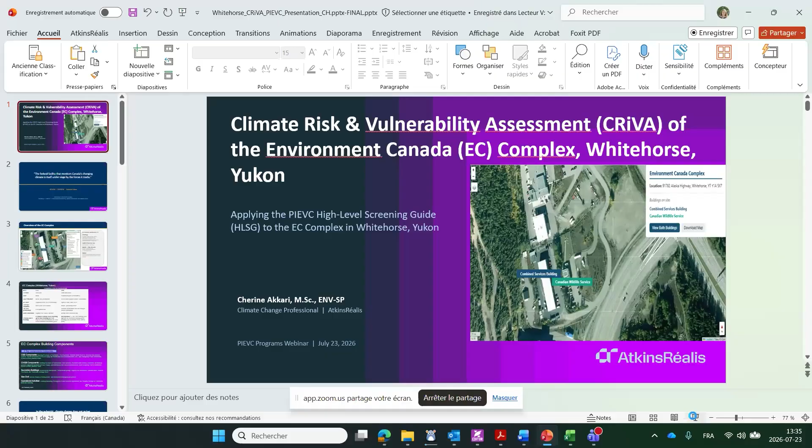Really quickly, just a quick introduction to Cherine. Her first presentation is again climate risk and vulnerability assessment of the Environment Canada complex in Whitehorse, Yukon.

Cherine Akkari is a climate change specialist focused on climate risk and vulnerability assessments for infrastructure systems and municipal assets. She has extensive experience applying the PIEVC protocol to evaluate climate hazards, integrating outputs from regional climate models, including downscaled CMIP6 projections commonly used in Canada to assess future risk reductions. She conducts risk assessments using PIEVC-aligned methodologies consistent with ISO 14091 and ISO 31000.

She integrates climate considerations into engineering design, asset management, and planning processes to enhance long-term resilience. She will be introducing a project focused on the federal complex, where Environment and Climate Change Canada monitors Yukon's rapidly shifting climate under siege by the forces it tracks. Using the PIEVC High-Level Screening Guide, or the HLSG, they screened 322 climate infrastructure interactions across 14 hazards and 3 planning horizons.

They also held multi-day workshops with ECCC operators. The findings expose how compound hazards reshape risk at a pace that outstrips current design standards, and a concordance analysis confirmed that projected snow and wind loads will surpass current code design values before mid-century. That is all really great, and she'll be elaborating on this project even further.

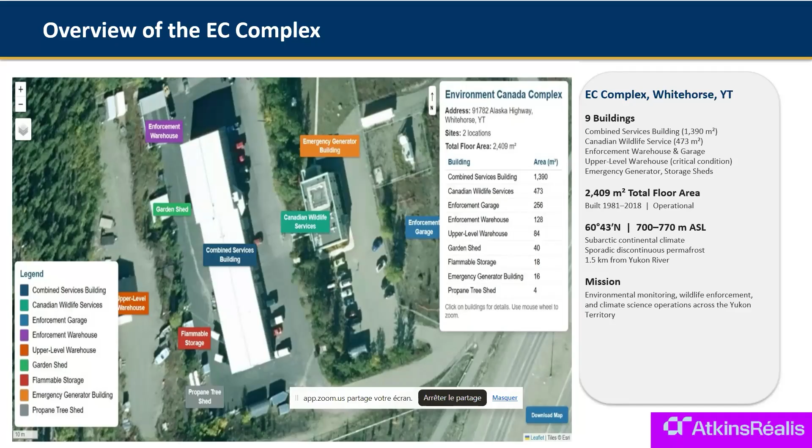Let's dig in a bit into the two main buildings of the site. So we have the Combined Service Building and the Canadian Wildlife Service on the right. Both have elevator units. One is older than the other one. In terms of roof, one consists of metal, the other is asphalt shingles, which makes it combustible when wildfires happen in the region. In terms of superstructure, the CSB has metal as well, and the Canadian Wildlife Service has wood frame. For the AC units, they use mostly R22 condensing units, some of which were upgraded in 2018.

In terms of envelope conditions, the CSB has more wear, that means more repairs, and the Canadian Wildlife Service has a newer envelope, which is generally performing better. In terms of water infiltration, the CSB has more issues than the Canadian Wildlife Service building. In terms of backup power, the CSB has a dedicated backup power building, as well as an internal EPDS battery pack, which is the emergency power distribution system. The CWS does not have any associated backup power building, but only has an internal EPDS battery pack inside the building itself.

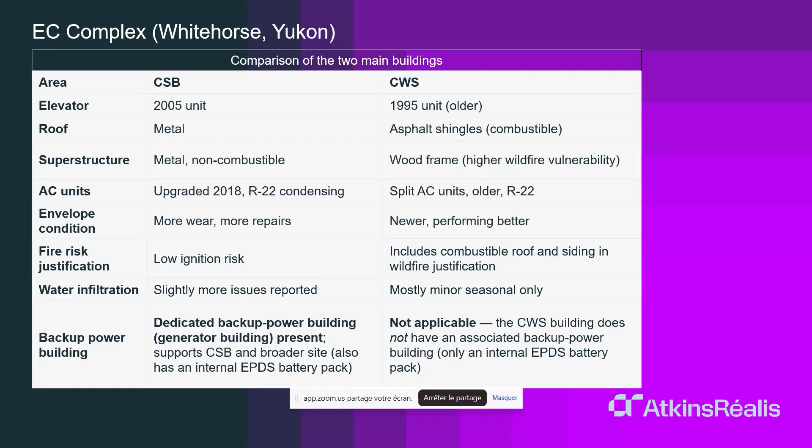After doing some research about the site and validating all the components with the stakeholders associated with the site, we came up with 4 infrastructure component categories, which are the two main buildings, very detailed: building systems, roof system, exterior walls, etc. So these are the subcategories. We also have the secondary buildings, which I showed in the previous site map. Site civil consists of access road, parking areas, and stormwater management system. In terms of operational activities on the site, we have loading and unloading activities. We also have emergency power distribution system operation, and propane storage and flammable materials handling.

So what makes this site specifically vulnerable to different climate variables? One of the key messages is that climate change in northern regions rarely arrives alone; it arrives as a convergence. For instance, below ground, we have permafrost degradation, which affects mostly foundations, buried utilities, and drainage systems. Above ground, we have intense precipitation. Here we're talking about mostly increasing precipitation, short duration, high intensity rainfall, rain on snow events, which place growing stress on roofs and site drainage. And on the other hand, we have fire and lightning, which are very common in the Yukon region. So all these hazards interact with one another to create risks that are usually bigger than the sum of their parts.

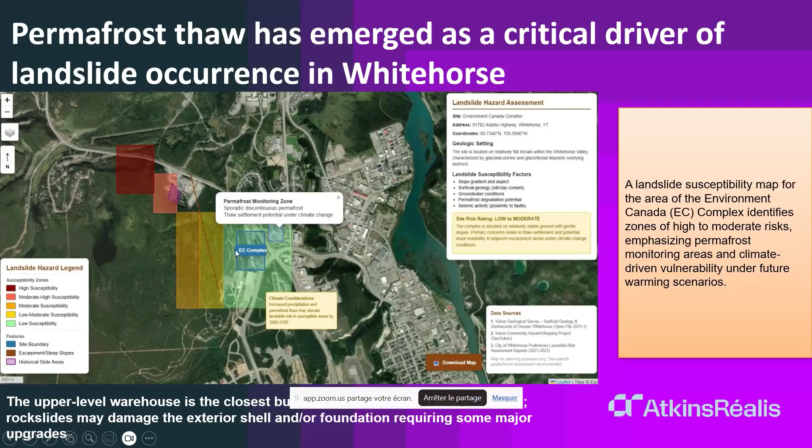For instance, here we also see a steep slope with intense rainfall, and permafrost degradation is also going to affect the upper level warehouse, where secondary buildings are close to the hill here. Also, rock slides may damage the exterior shell and the foundation, which will require some major upgrades in the near future.

So with that, how did we assess all the components, including the variables and vulnerabilities associated to the site? We applied, as I said, the PIEVC high-level screening framework. The first step is we define the scope that includes the physical boundaries of the site, the associated components, and the climate hazards. Second, we gather the climate projections as well as facility condition information and operational knowledge. For the building conditions, we also relied on site drawings given by the client.

In this case, we required our team to have different types of engineers, including site, civil, structural, and electrical engineers mostly. For the operational context, we also did a pre-workshop with the different staff working at that facility in the Yukon.

The third step, we assess the risk using the likelihood and severity ratings. We used a scale of 5. And the fourth step is the reporting. That includes the risk classification matrix, including adaptation measures and gap analysis.

One important note here is that the assessment was carried out in an operational phase. So we were evaluating risk to existing infrastructure that is currently in service rather than risk associated with design or new construction.

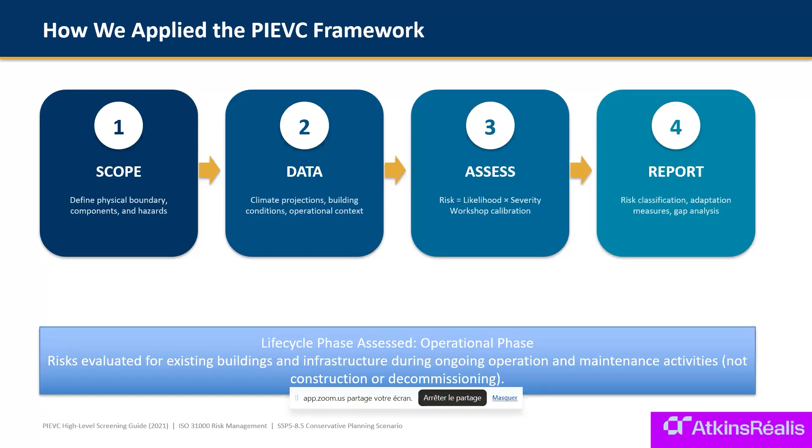So here's the scale of the assessment. This was, as you can see here, a relatively large screening exercise. We assessed 23 infrastructure components against 14 climate hazards under 3 time horizons, using mostly SSP5-8.5 because it was the most conservative scenario. It was also required by our client. And we also identified more than 80 adaptation measures.

A major strength of the process was stakeholder engagement. The facility staff participated in a pre-workshop session as well as in multi-day workshops and brought decades of operational experience into the assessment. That point alone was essential and critical when assigning severity ratings and validating the practical implications of the different climate hazards that we identified on the site.

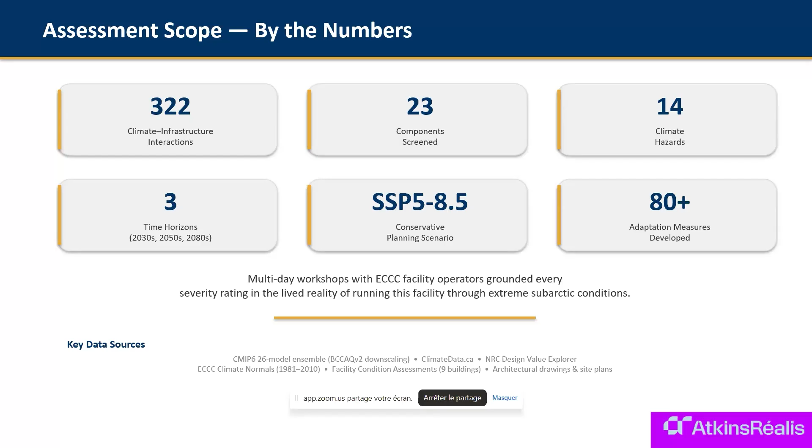In addition to that, the assessment was driven by climate projections developed specifically for Whitehorse. As you can see here, a dashboard summarizes the key climate indicators. Of course, we evaluated more than that, but in terms of summary, these are some of the simple climate indicators. The message here is not a single number. The takeaway is every indicator points toward increased exposure.

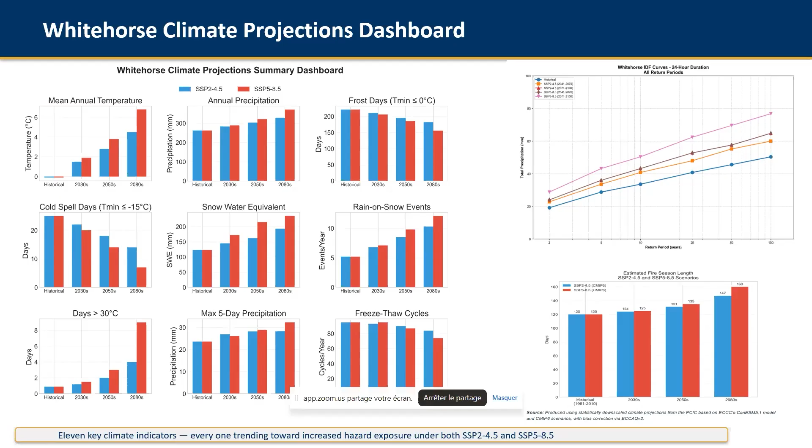As we can see here, even if some of them are decreasing in the future, for example cold spells, they also have a consequence, for example increasing rain on snow events. The freeze-thaw cycles are decreasing, but that would also affect the degradation of permafrost in the future. With warmer temperatures, we can see increasing rainfall intensity, changing snow conditions, and a longer wildfire season, all contributing to a higher future risk under both scenarios, SSP2-4.5 and SSP5-8.5.

Similarly, we have the longer wildfire season, which increases the exposure of different infrastructure components, while also raising the lightning frequency, which increases the ignition potential. So these hazards are not additive; they amplify one another. This is why compound climate hazards came in as a key theme in this assessment. In the next slide, we are going to see 3 examples that emerged as some of the important compound risks for this facility.

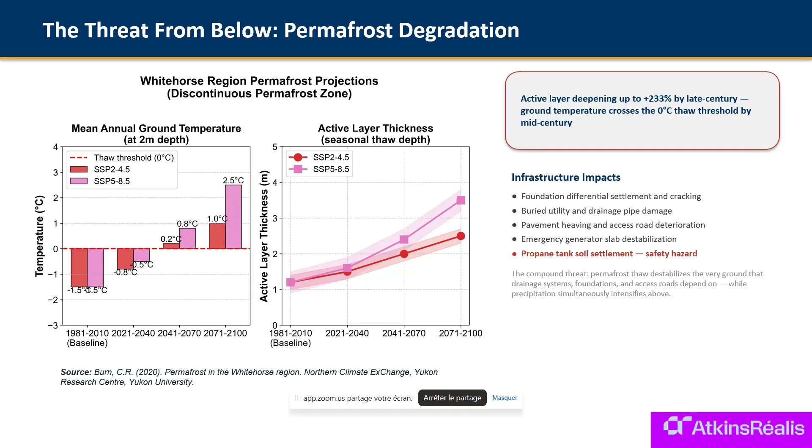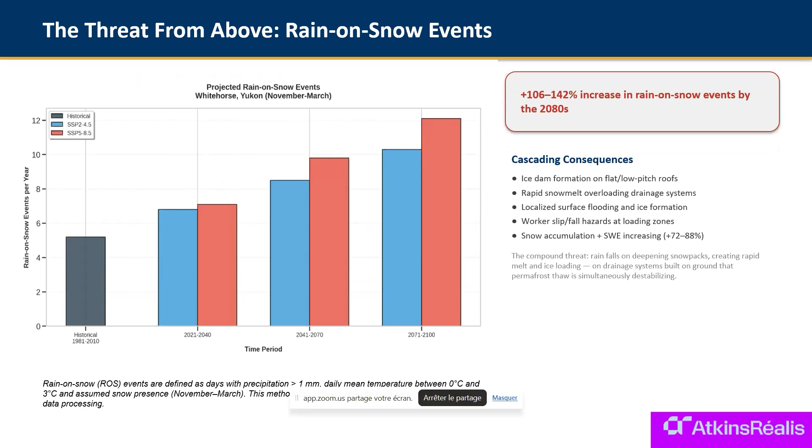The second indicator that was important from this assessment was the rain on snow event. We can see here that ROS events are projected to more than double by late century. These events generate rapid snowmelt, increase roof and drainage loading, and create localized flooding and ice hazards. What is particularly important is that systems designed to manage water may already be affected by permafrost degradation at the same time.

The third was fire and mostly lightning, because in the Yukon region most wildfires are caused by lightning. Since most large Yukon wildfires are lightning ignited, these trends reinforce one another. Vulnerabilities include the electrical system. Some buildings didn't have any surge protection in place.

Also, a very important system was the propane storage, particularly because there was no lightning protection. The HVAC system of the building also did not have adequate smoke infiltration protection, which was a very important critical point as well. So we can see how these vulnerabilities are becoming very important for the site.

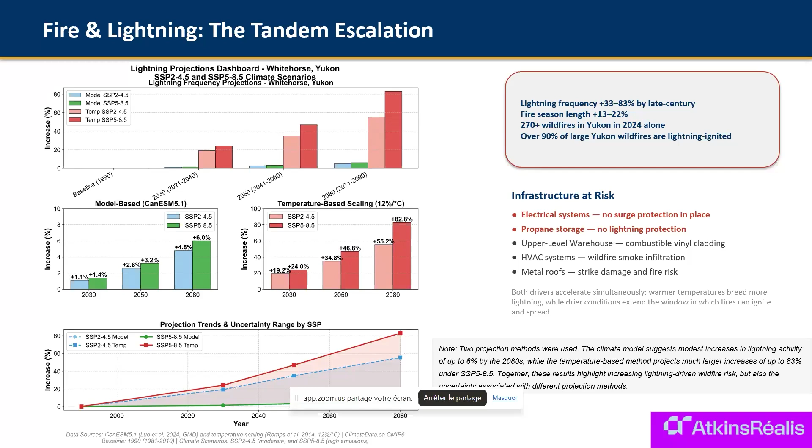After evaluating these hazards individually and collectively, this is what the overall risk profile looked like. After screening 322 interactions, the overall picture is a bit reassuring, but also concerning at the same time. Most interactions remain low risk today. However, nearly 1/3 are already in the moderate to higher risk category, with permafrost and lightning responsible for many of the highest risk interactions. The message is that climate risk is not a future issue for the facility. It's already happening, with compound climate hazards already occurring on the site.

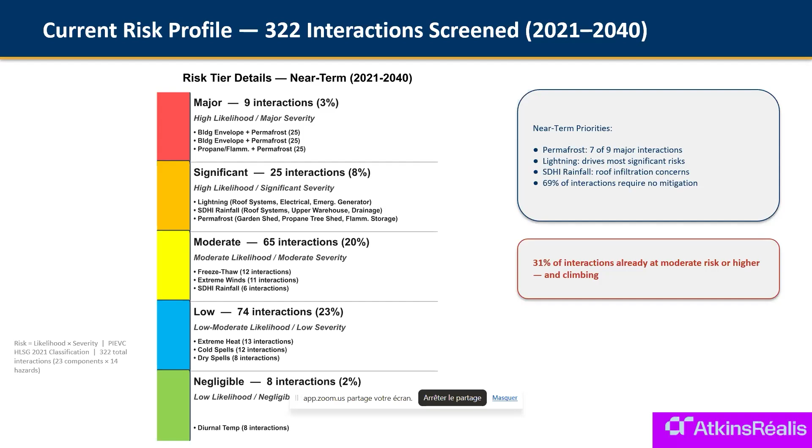So how does risk compound over time? When we compare near-term and late-century conditions, risk clearly moves upward. Major risk more than doubles, significant risk nearly doubles, and low risk interactions become much less common. The takeaway here is climate change is not creating entirely new risks. It is amplifying existing vulnerabilities and pushing them into a higher risk category. And some of the interactions increase faster than others.

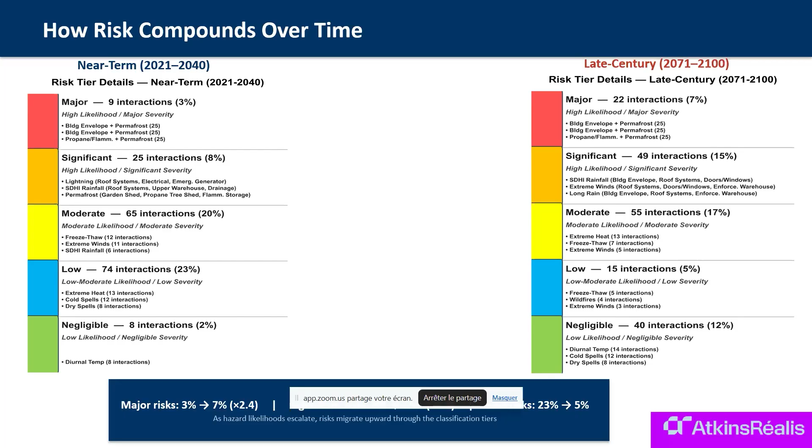On this slide, we see the risk escalation, the fastest growing risks across the entire assessment. Several interactions involving propane storage, lightning, and permafrost reached the highest risk score by mid-century. These interactions are very important because they combine high likelihood with high consequence. One of the key messages is that lightning is the dominant future risk multiplier, pushing multiple infrastructure and operation systems into the major risk category by mid to late century.

In addition, permafrost degradation remains a critical risk driver, with several component-hazard interactions reaching or maintaining maximum risk levels, approximately 25, which is the highest. The roof system showed the broadest risk escalation, with increasing risk from lightning, short duration high intensity rainfall, long duration rainfall, rain on snow events, and snow accumulation. And landslide hazards and precipitation indicators are increasingly important drivers of infrastructure risk, particularly for the warehouse, drainage system, and site operations.

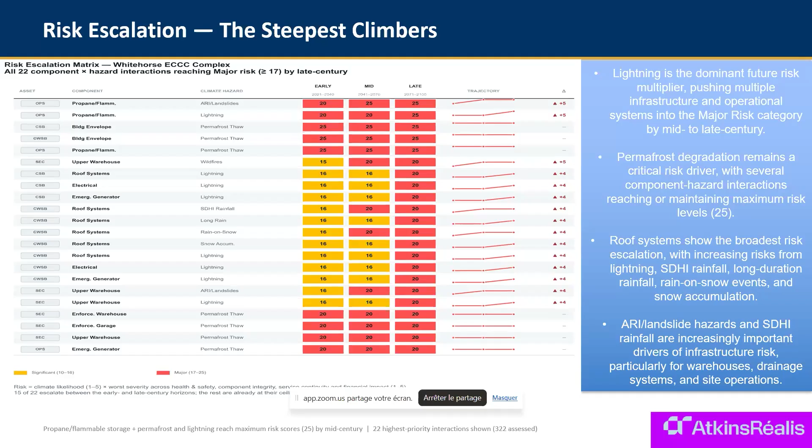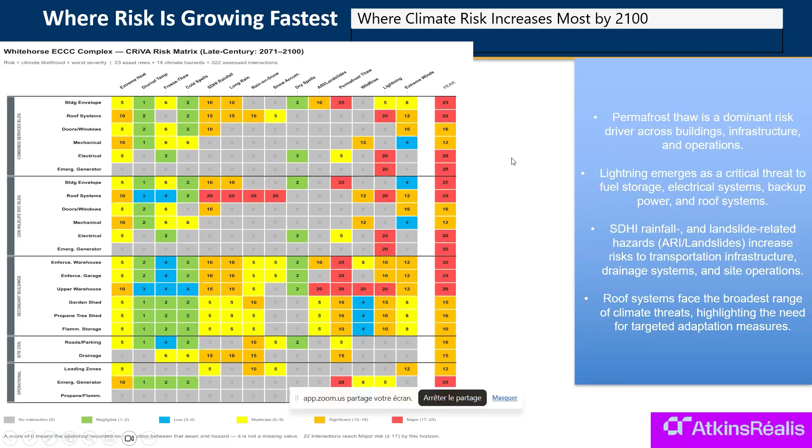So which hazards drive the most risk? Across all time horizons, two hazards consistently rank above the others: permafrost and lightning, driving the highest risk category scores. Lightning emerges as a critical threat to fuel storage, electrical systems, backup power, and roof systems. Roof systems face the broadest range of climate stress, highlighting the need for immediate targeted adaptation measures. Here we can see mostly lightning and permafrost are the most important indicators in this assessment.

The next question is, are current design standards sufficient to handle the new changes at this facility? We downloaded the ground snow load design values from Climate Data Canada. From the projections, we noticed that snow loads are approaching the limit and exceeding the NBC 2020 design values by mid-century under SSP5-8.5. Driving rain pressure is also increasing, exceeding the envelope design assumption.

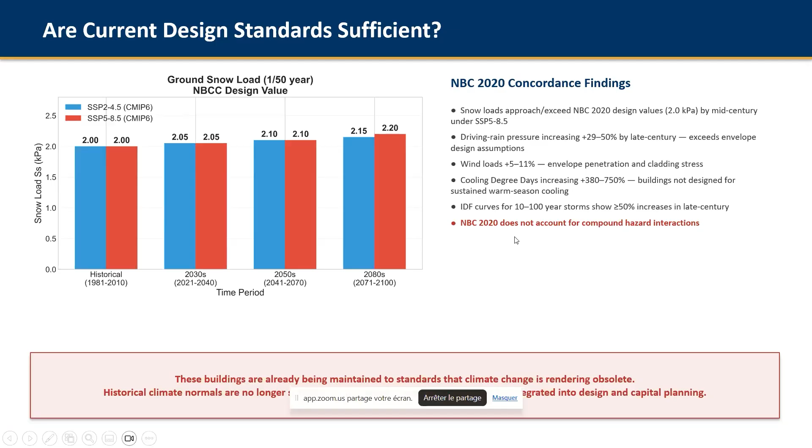Wind loads are slightly increasing, but also have consequences for envelope penetration and cladding stress. Cooling degree days are increasing a lot, and buildings are not currently designed for sustained warm season cooling. As we saw in the previous slide, IDF curves are also increasing. We noticed that the NBC and standard designs do not really account for compound hazard interactions. They probably take them individually.

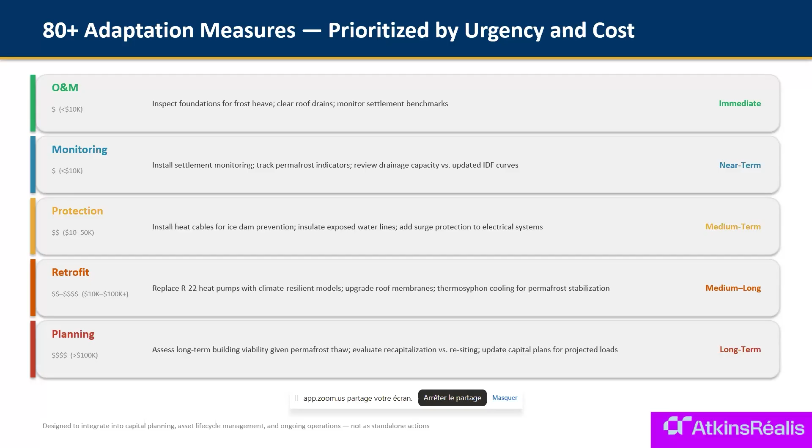So in terms of the adaptation measures, we came up with more than 80 adaptation measures, as we can see here. So the goal is to integrate adaptation into normal asset management rather than treat it as a separate initiative. As you can see here, many of the adaptation measures are low-cost actions that can begin immediately, such as inspection, monitoring, and improved maintenance. Others involve longer-term capital planning, investment, including equipment upgrade, roof improvement, and permafrost-related interventions.

So with that being said, the assessment also has taught us many points here, as we can see. The project, in fact, showed how the PIEVC framework can translate climate scenarios into infrastructure decisions. It provided a structured approach to prioritize risk, support stakeholder engagement, and create a transparent basis for decision making. Perhaps most importantly, it provided a common language for discussing climate risk among different stakeholders that includes engineers, operators, and planners.

So of course, no assessment is without limitations. Here are some of the limitations that came to us throughout this assessment. We have to keep in mind that compound hazards are not explicitly represented in the PIEVC, especially within the scoring framework. More specifically, there's no formal mechanism to capture multiplicative effects, for example, permafrost weakening, etc. So risk scores may understate the true compound exposure.

The second point was some data gaps remain, particularly for site-specific permafrost conditions. More specifically, the severity calibration required significant professional judgment beyond what standard guidance provides. This is why we had to do many pre-workshops with the staff at the federal site as well. Another limitation was that the screening level assessment is designed to prioritize risk rather than replace detailed engineering. So this remains high level.

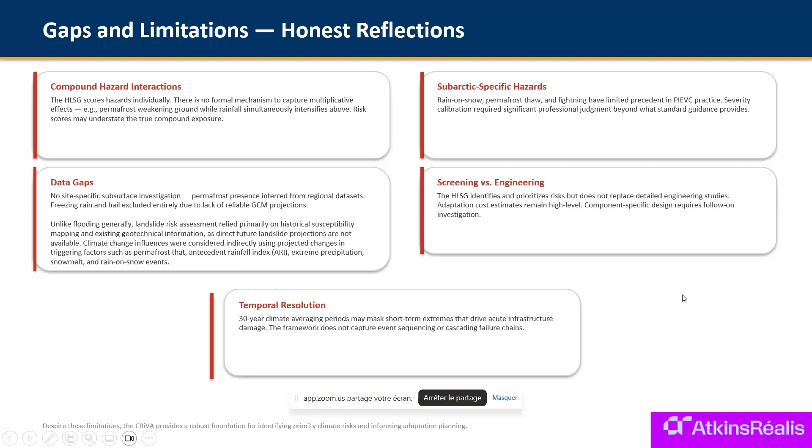So what this assessment teaches us: first, compound hazards are becoming a defining feature of northern climate risk. The second point is that projected climate conditions are increasingly challenging existing design assumptions. The third point is that stakeholder knowledge is essential for producing meaningful risk assessment. And finally, the PIEVC framework provides a powerful starting point for identifying climate risk and supporting adaptation planning.

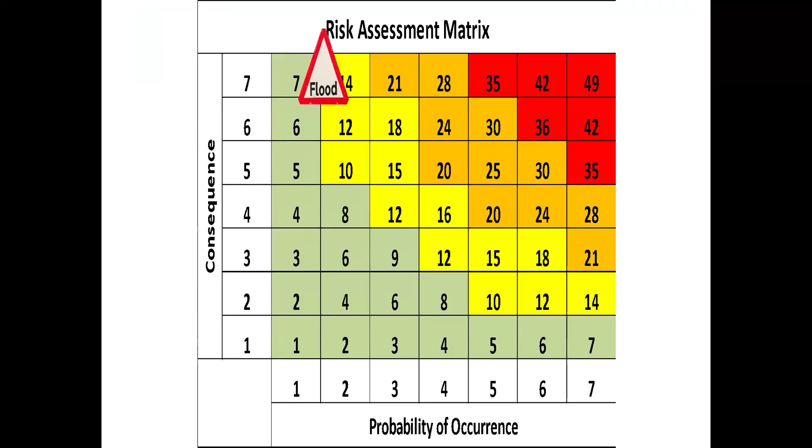So here's a risk assessment matrix. This one typically has 7 levels, but of course, as was shown earlier, you can use 5 levels, 3 levels. So the protocol allows you to choose that. But the strategy here for engineers is take a scenario where a flood has a low probability of occurrence, but has a high consequence. But because of climate change, the probability, that area under that curve, increases. So therefore, it shifts it into a high risk situation.

And so the idea is to adopt climate adaptation measures to reduce that flood risk down to an acceptable level. Not necessarily zero, because that's very expensive to do, but down to a level that's acceptable, so that the chances of exceeding those threshold values are reduced, right? So that's where the whole notion of risk assessment comes to bear and how it impacts on engineering practices.

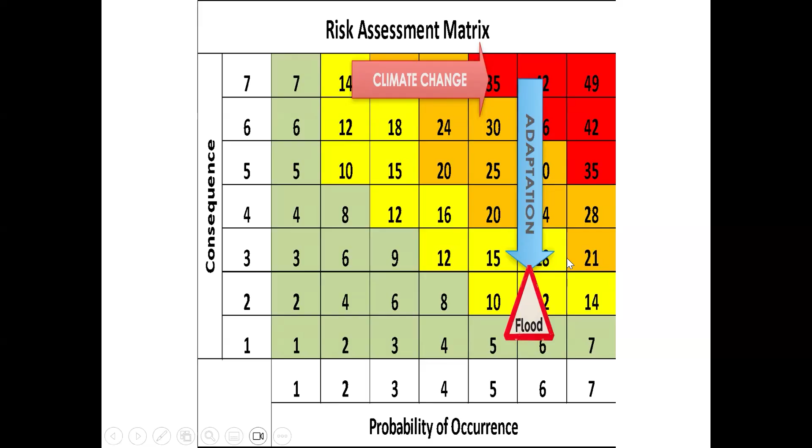In my view, it's a vital tool for engineers to understand what to do with respect to infrastructure and climate change, which of course, by extension to PIEVC being the tool that does that, makes the value of this, I think, very relevant and useful for engineering decision making. And as I mentioned at the beginning, we have 30 million engineers worldwide that we need to educate about this. And it is being done through this model code of practice, which by extension goes into PIEVC and climate vulnerability and risk assessment.

So how does the model code define climate resilient infrastructure? It's planned, designed, constructed, and operated to withstand climate impacts, with an ability to recover and restore service. So it's not just about the design, it's not just about the construction, it's not entirely about the operation and maintenance. It also is how do you deal with the events. So that includes things like disaster risk and recovery, planning, and operations.

So I always say engineers should have a voice in those decisions, not only the design and construction phases, because to make this resilient, you need to be able to recover quickly. So, the code of practice, as mentioned at the beginning, has 15 principles, and they're divided into 3 groups.

The goal of all this is that engineers consider the implications of climate change and create a clear record, demonstrating that they considered it and documented it. If you do that, you've met your professional obligations and discharged your professional liability—no one can say you didn't consider climate change if infrastructure fails. The PIEVC tool is a beautiful way to demonstrate that consideration and documentation, because you take that information forward into your engineering decision making.

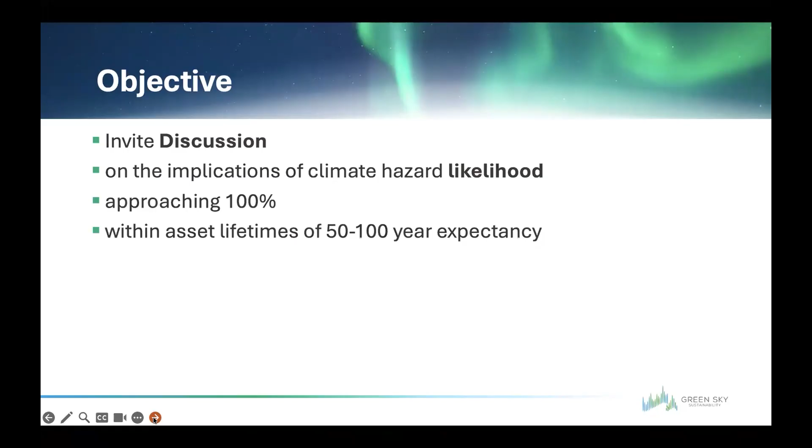So a bit of discussion—the heart of it is that it's hard to forecast what the likelihood might be. We've done a number of these climate lens assessments for different infrastructure projects. Usually a company, organization, or municipality wants funding, and the federal government says, okay, do a climate lens assessment, which is a lot like the high-level screening guide, the PIEVC, the same kind of approach. But the challenge for us came when asking: what is the likelihood? What should we assign to that?

So those are the kind of projects. Just a few examples we came across, and I think there would be a lot more. How do you forecast a heat dome? The likelihood of that? Sometimes even extreme flooding—we just worked for a client in Manitoba, and they told us about 2 or 3 recent big flooding events in the 2000s, a few years ago, and then they have one right now, a big flooding event. So yeah, it's hard to say when.

Even wildfires—like BC, for example, we went through that worst fire season on record, and we thought, what's next year going to be? Well, it wasn't that bad, relatively speaking, then it went bad again. So how do you do the likelihood? Storms, I think, come into that too. Temperature increases, some precipitation event increases—those are a little bit easier to project.

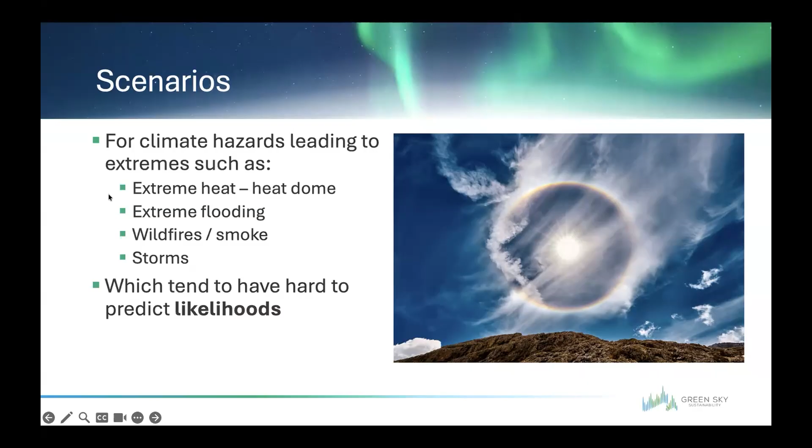So a question is, in our risk assessment, we do likelihood times consequence. How do we pick that up? If you remember Cherine's study, the slides of the climate hazard projections—they're all going up, and as time went on, they're all getting higher and higher. For long-lived infrastructure in particular, over a short period like 10 years, how many times could you have a bad event happen compared to 100 years? Again, it makes it more likely in my mind.

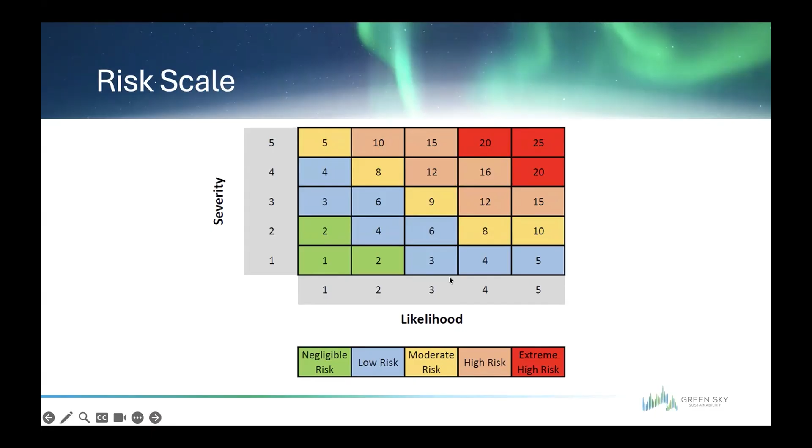So just taking the standard risk assessment approach here, the question is: what do you really assign for likelihood? The climate lens assessment gives us something like that. The high-level screening guide maybe is a little bit more advanced because it gives a baseline in the middle, saying okay, the higher would be if we get over this. And I suppose if it's even over 100%, it still is in the five—that's as high as it goes. So that may be quite a bit more helpful. But again, you also don't want to overrate the likelihood. So how do you assign it—is it 3, 4, 5?

Do you agree that it's difficult to establish these likelihood ratings, especially for these kind of extreme events? Do we need something more than what PIEVC has right now, or is it just a special consideration people should be aware of, like what Cherine said about the compounding effects?

We need to think about that. Regardless of whether you think it's yes or no, if you have any solutions to this, I'd like to know that. That's the key thing. I'd like to know how do you deal with it?

So I have one recommendation. I noticed Cherine mentioned that she used ISO 14091. Well, it talks about screening level assessments. So that's a good way to start, and I think that's ideal for everyone.